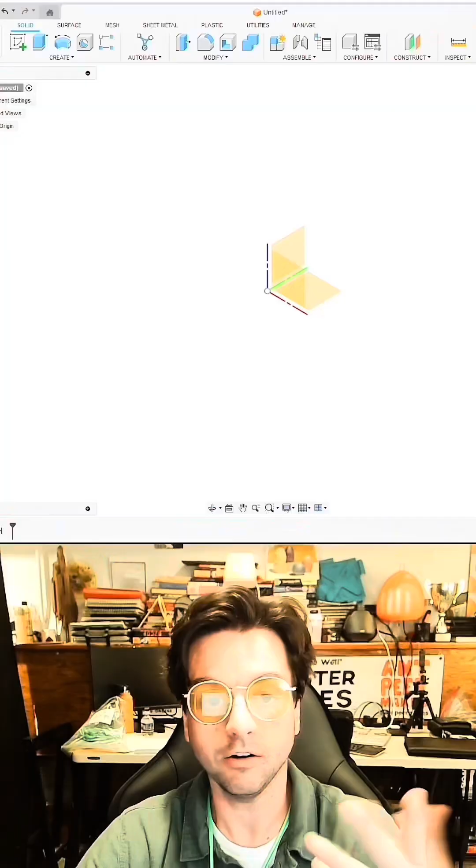All right, so I'll see you in a little bit, maybe 2 hours, have this done possibly by 12 o'clock tonight. All right, so we're gonna get moving here on putting in some of the work for the 3D model.

So the first thing I did was I brought in the sketches I made, and I'm gonna throw them into the scene. We could always hide them, change the transparency. This is the main thing we're going for, right? That guy, right? All right, there we go.

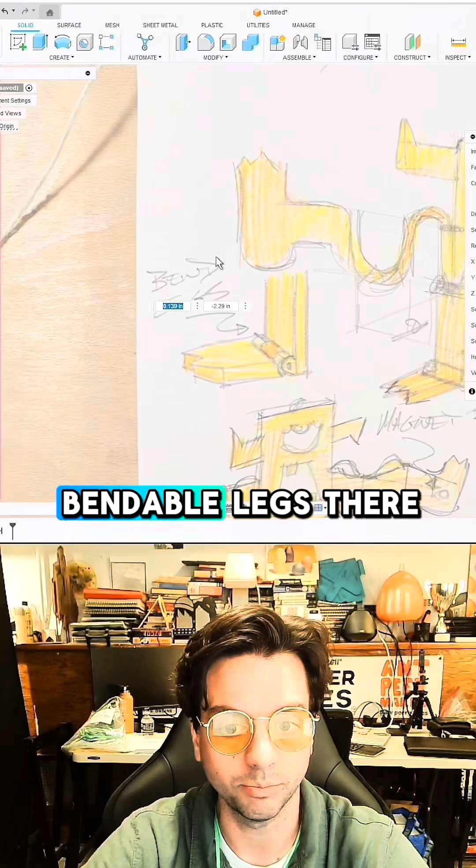All right, so here's what we're working with: we have a print-in-place ornery ox with bendable legs there and movable feet, right?

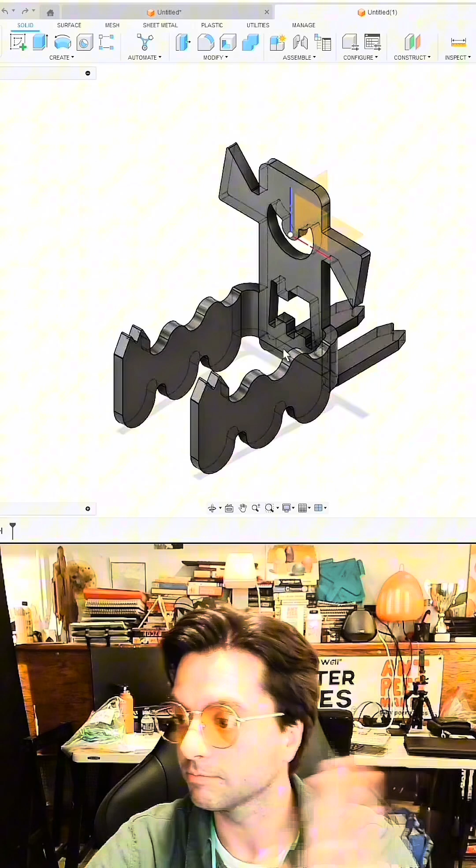First thing I'm gonna do, I'm gonna start out with a little sketch here. In this case, I'm gonna recycle a lot. All right, so I already have the character made in 3D. So we're gonna open up one of our older documents, copy this sketch face, right? And then we already have basically a base design to work with.

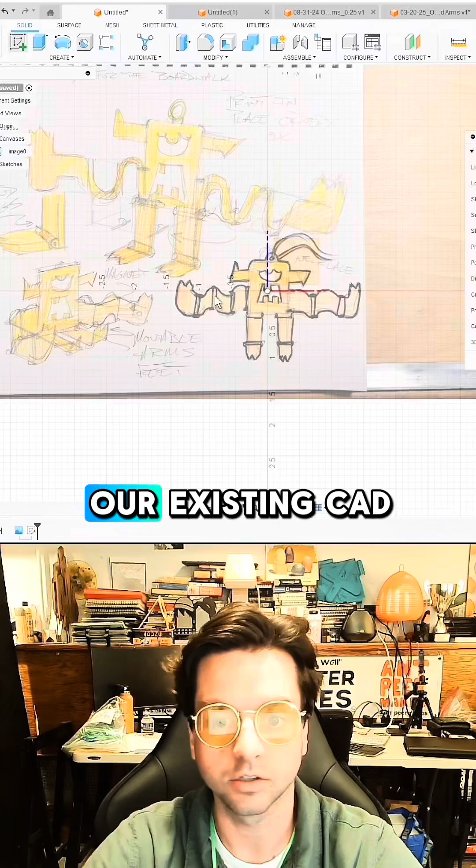So I'm just gonna grab this sketch, project that for no apparent reason, because I just want to grab the whole thing, project that face. I'm just gonna grab this and pull it into our existing 3D, our existing CAD. So I'm gonna just place that there.

Alright, rotate it 180 and see how big it is. Alright, how big is this? 1.625. What I want to do is hide this canvas for a little while and then create a sketch.

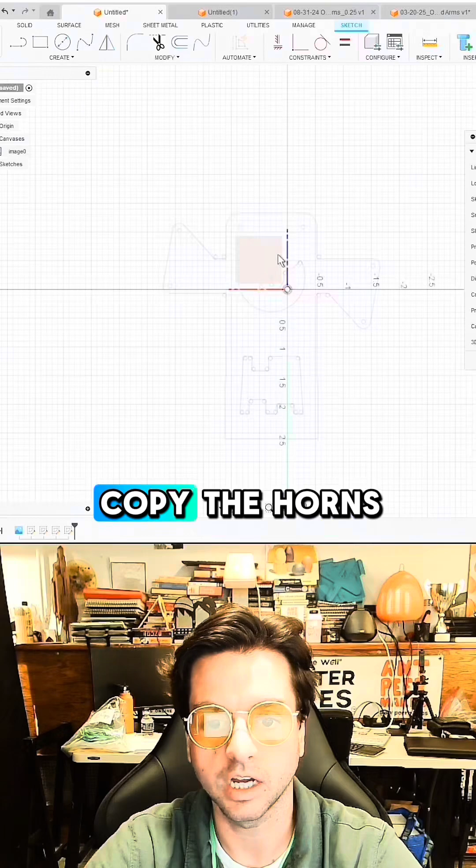And take the eyeball and the mouth. That's it. And then copy the horns, because we're just going to start this off with a rectangle. We'll center rectangle to give us our body.

Alright. Always keep my calipers handy. So I like the width of this. It's a little big, but let's see. I think it's an inch and 2.375.

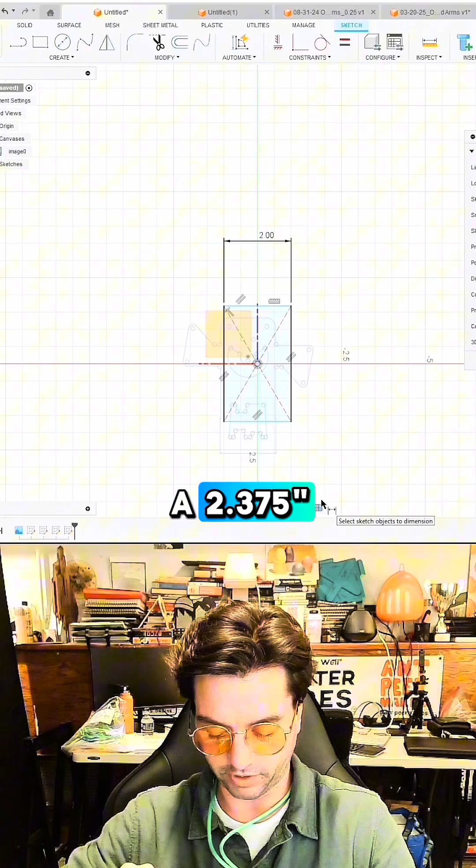So 2 inches wide, and then 3.375 tall, 3.5 — we're gonna start off with that. So that's gonna be easier. So what I'm gonna do here, I'm just gonna throw that there. There we go. All right, that's locked.

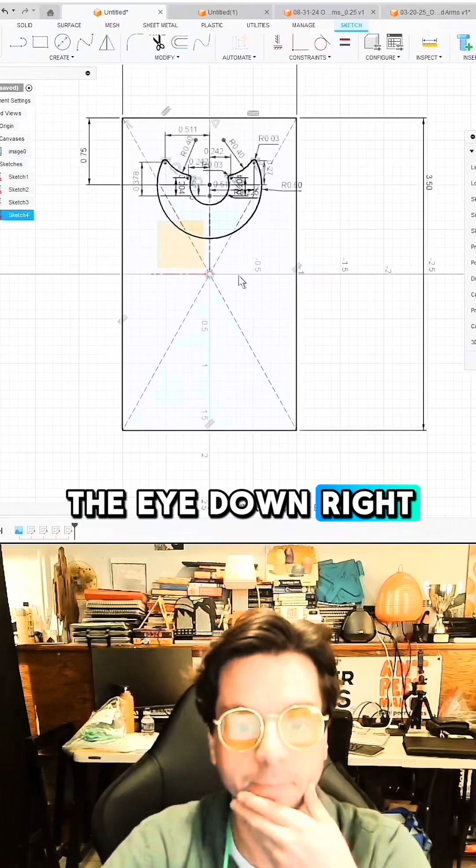So we have the eye down, right? So what I'm gonna do from there, just go here, open that, put an anchor point in the center, coincident here. Okay, we'll do that. There we go.

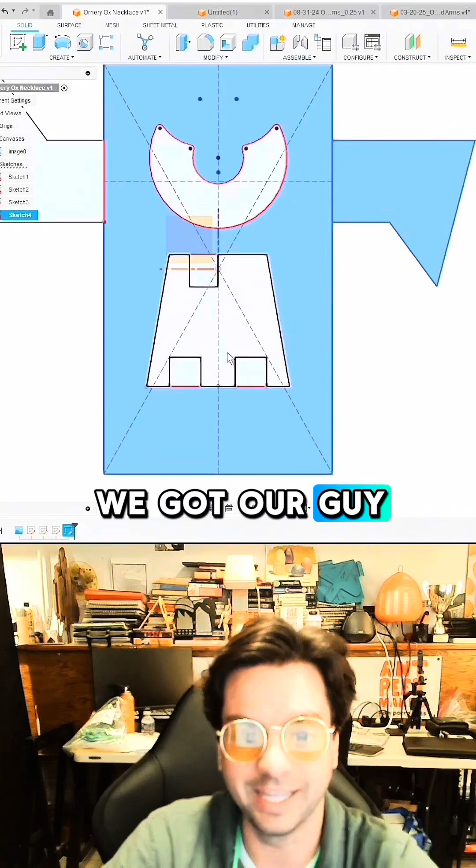Okay, we got our guy right here, Ornery Ox. So here's where we're gonna incorporate some of our canvas, right? So we have some of the sketch there. I'm gonna do some squiggle arms, gonna do some other stuff.

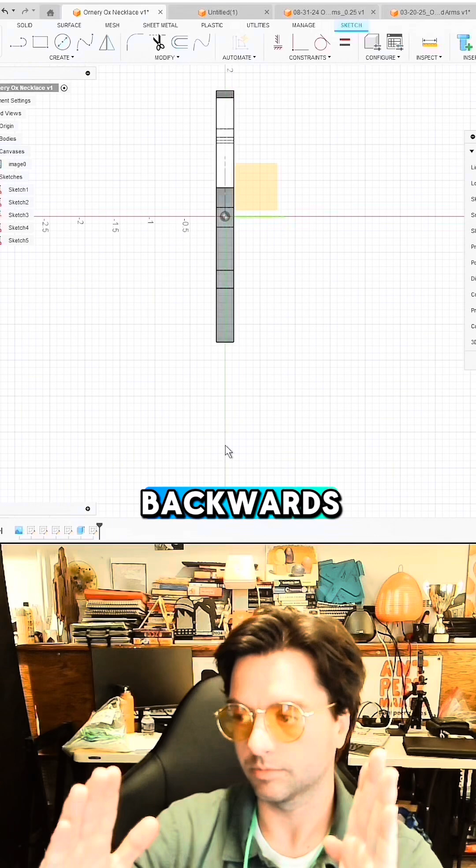But the first thing I wanna do, maybe I'll get the legs right. Alright, yeah, his legs are gonna go backwards. Okay? So what I'm gonna do is have a fun little thing where I've done it before. Just gonna make this, alright, 0.5, 0.375.

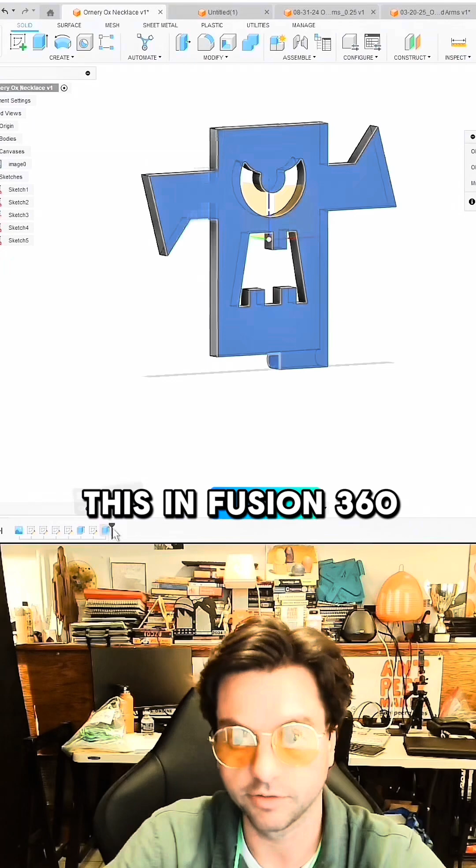So we have that. Here, I love this part, that I do like this in Fusion 360, which they have in other things — just the mirror feature seems to work well. Alright, so we have our little legs there that are gonna fold backwards.

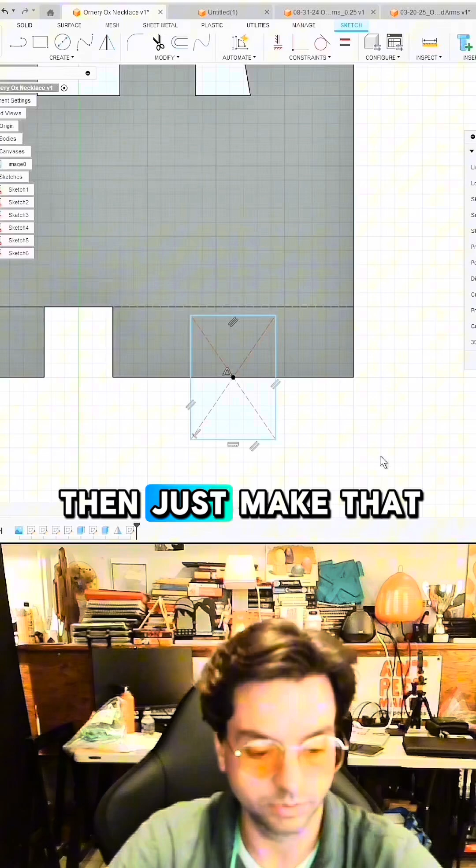Alright, so the next part we're gonna do in this sketch is cut that. So at this point here, and then just make that coincident. Okay, I gotta look at my necklaces now.

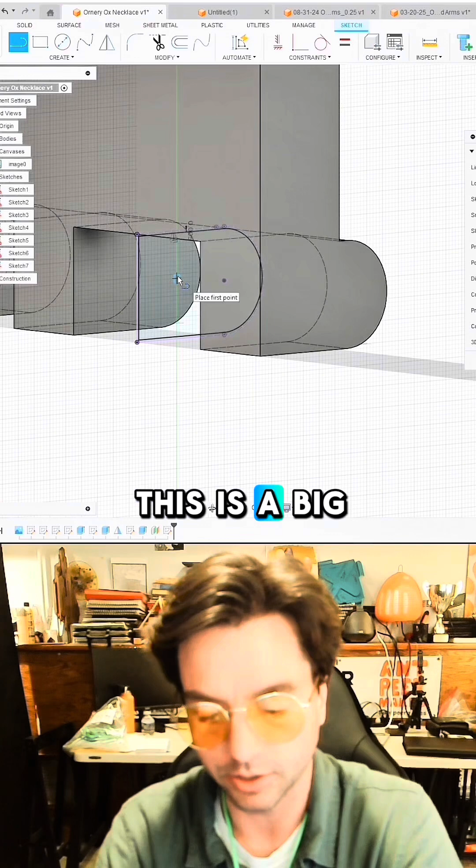There we go. So I got my old Christmas tree necklace, right? This is a big hit. It was a fan favorite.

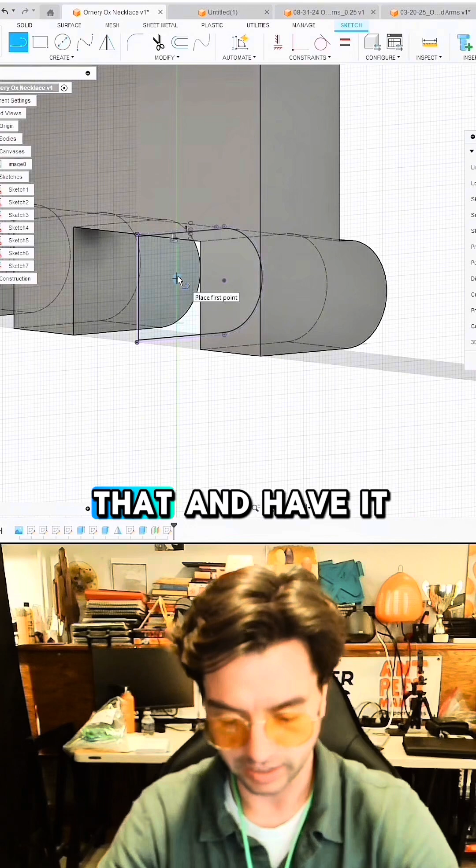So for there, I basically want to fold like that and have it stay, right? So if it folds back like there, I need it to stay in that position. That will be possible with a little latch. So it'll print flat like that, alright? And then come down, need to lock in. Do some tunes. Okay.

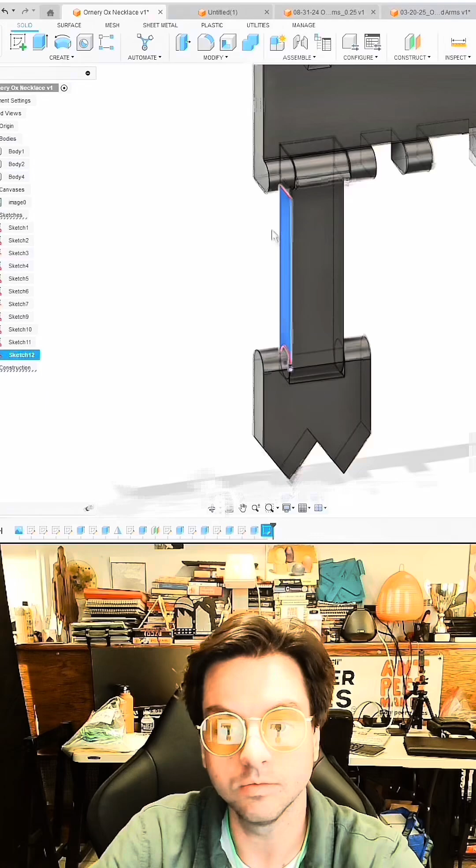Oh, voila! I think that's ready to print. With 11 hours and 47 minutes to go, this thing is set to print.

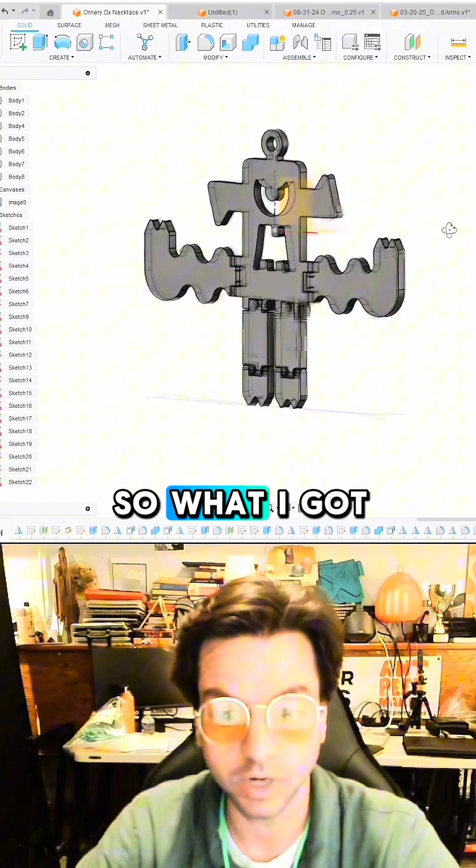So what I've got here is a little character. I'm gonna edit the appearance here, change it to some orange, just throw that on there. This is now a bright orange. All right, that's good to print. Let's see how it looks in the render. Either way, I think we're good to send this to print.

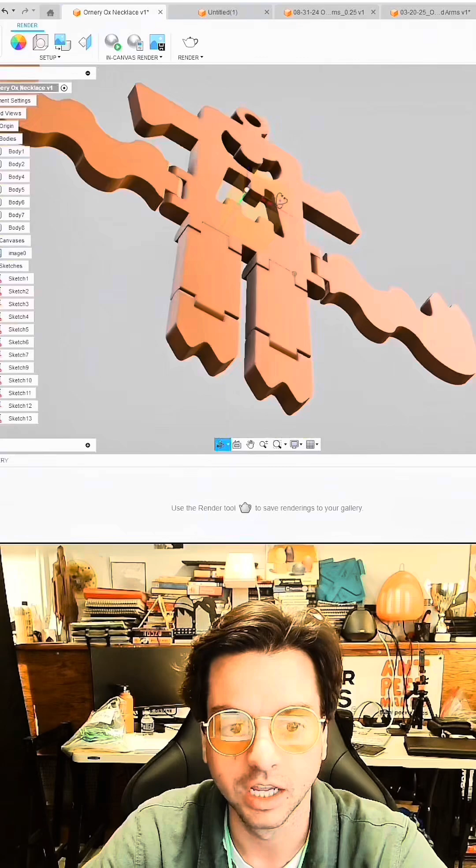I'm gonna print the whole thing. Let me open up my Bambu printer. Oh, one little change, one minor change I'm gonna make, it's going down that way.

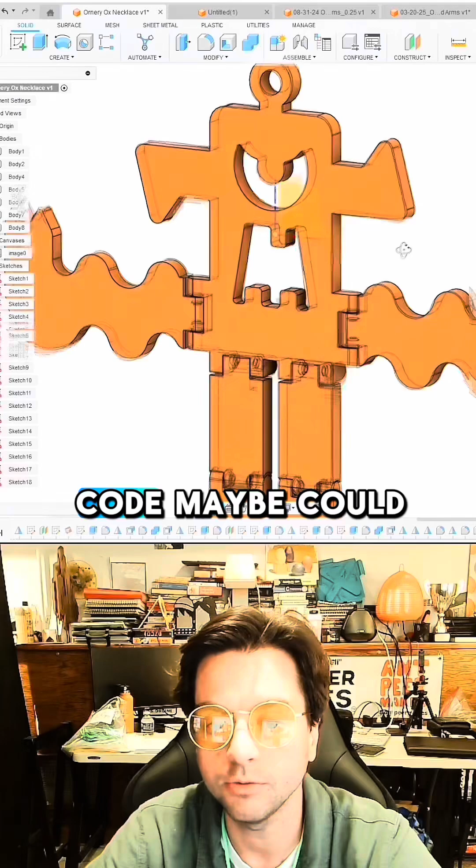Now that I have this, QR code maybe? Could put a QR code, but right now I'm just gonna put a face on it. So I'll go here, and then sketch, and then I just want to project this face there. Finish that, and then these are gonna be separate bodies.

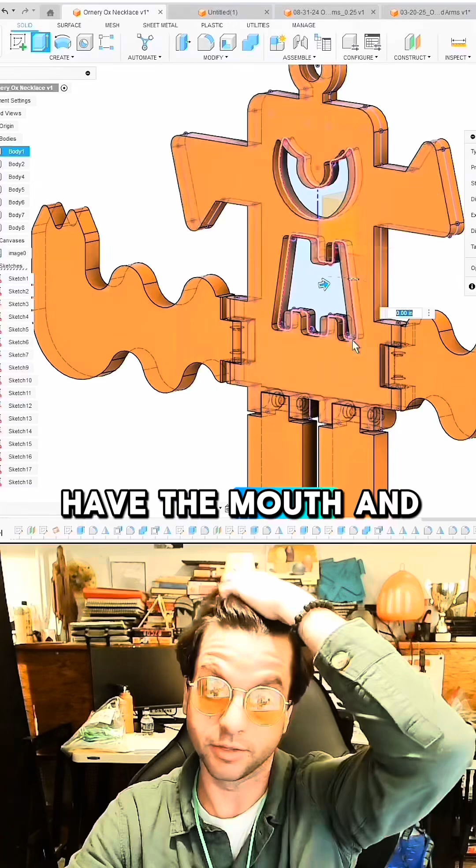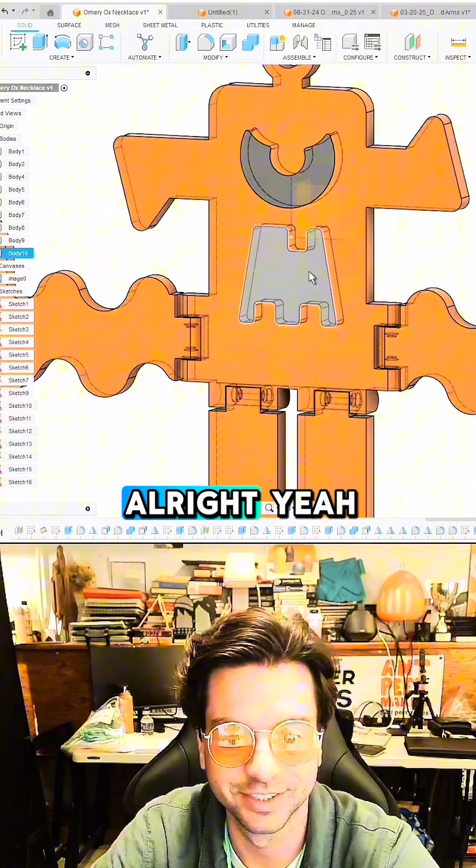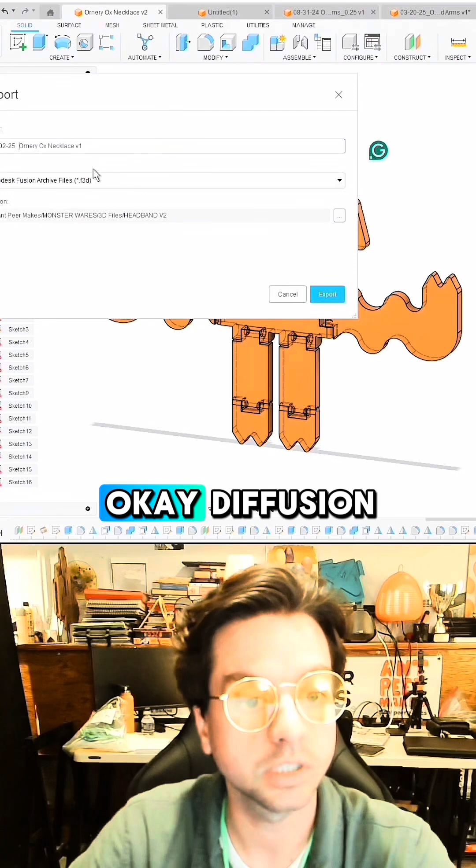I don't know how to do it, guys. Export this as a 3D print, or the version V1. Alright, 06 02 25, okay, Fusion, no, we're gonna export as an STL.

And then we're just gonna open up our... okay, boom, boom, boom. Nice, okay, so that's kind of what it's gonna look like, and the thing we're gonna do is paint the face here, the eyeball, and then we're gonna paint this red for now, but it's going to be black.

Pretty good, I think we have a little successful ornery ox toy that is almost ready to go. I think the one thing I have to do is just change that red filament. Oop, that's on the plate. And then let's see how long it's gonna take.

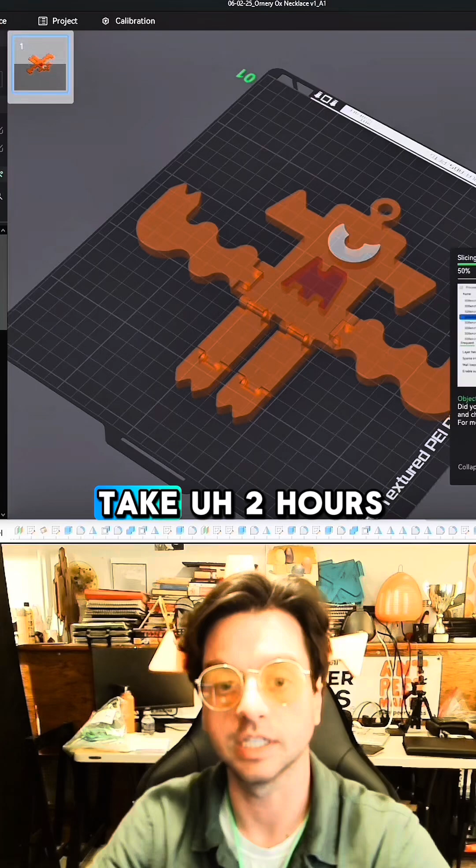2 hours, wow. Should I stay up? No, I shouldn't, but I want to. All right, I'm just gonna change the filament and I'll be right back. I changed the filament there, I'm just gonna connect to the printer again.

This is black, alright, so that's what it's going to look like. We got a little black mouth, white eye, both sides, and I'm gonna print that. Well, I wonder if I could get two. Ooh, oh no, I'll do one for now.

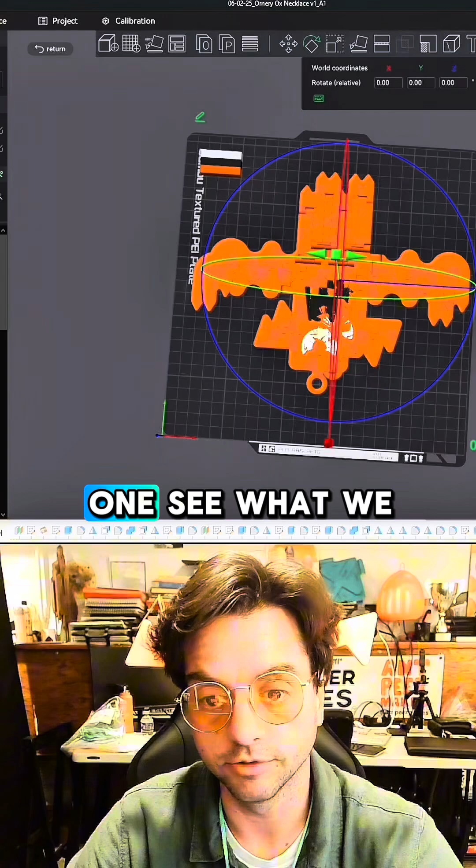We'll see what that looks like. I could always change the dimension, right? But let's just do one. See what we got, slice it. Slice and dice, alright, 2.5 hours.

Alright, so let's print that, let's print this bad boy, the ornery ox. Alright, so there we go.

I know, yeah, I don't talk, I'm not a good talker. I need to get better at that.

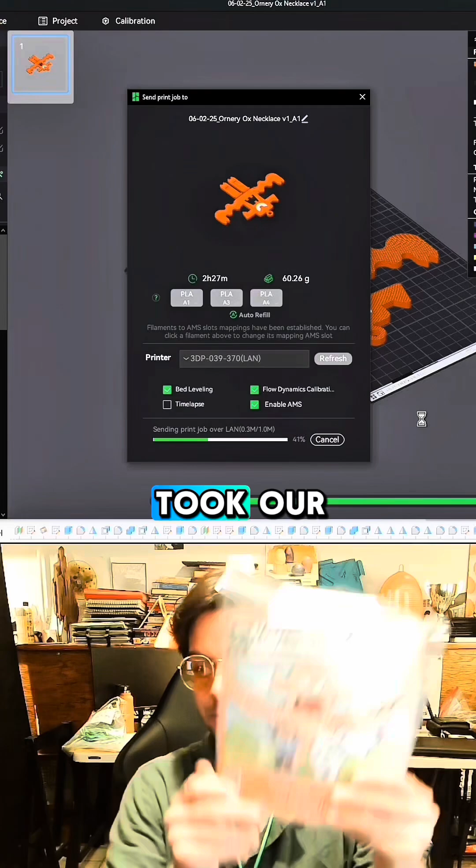Basically we took our ornery ox book, right, the ornery ox learns to be open, and then I took the sketches and made a little 3D printed toy in about 2 hours. So with some of my CAD experience, you could take a product from sketch to 3D print in 2 hours.

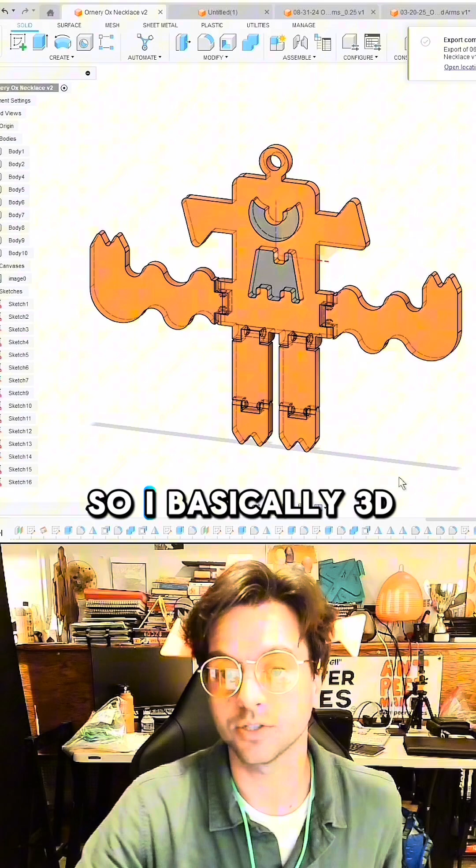Just 3D printing it, right, so I basically 3D modeled this in 2 hours and was able to get it on the print bed tonight. It's pretty fun, it's pretty fun. I think we'll see what it looks like tomorrow morning.

And if this works out, I would really like to do a little extender lock mechanism on the back here, so kind of this whole thing pops out and you press a little action, right. That would be really fun.